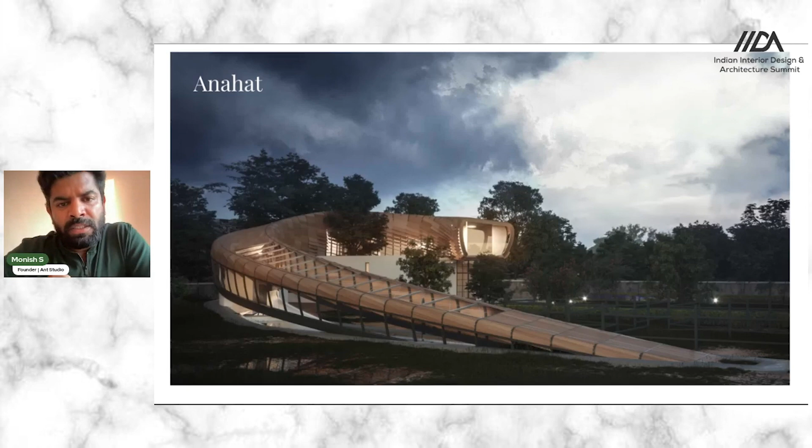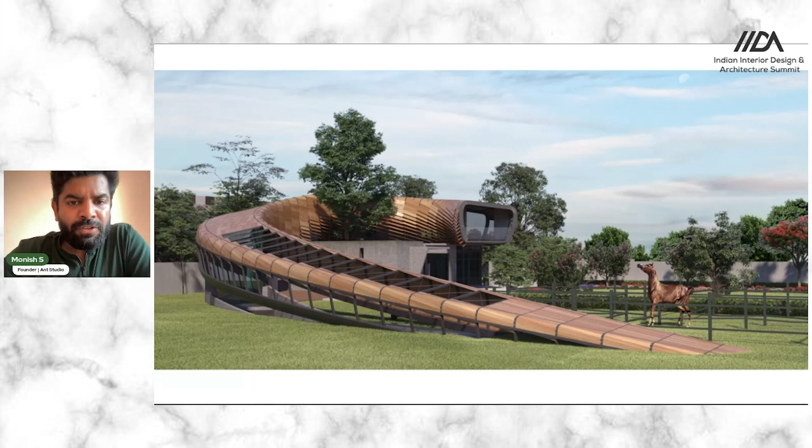So this is one of the first residences. While we have done a lot of work with parametric design, at the scale of a residence, this was one of the first works that we have done. These couple of renders were given to the client pretty long back, I think 6 or 7 years ago, which the client accepted, and then we went ahead and built this. These are the built images you see on the screen right now.

While the design is something that is very subjective, and driven by taste—some people like it, some people don't, and how the form came up is subjective to taste—today what I really want to highlight is what really went into it in terms of the effort, the tools that we looked at, and how much time did it actually take to deliver this.

If we had to do the same thing again, we'll probably do it much faster—probably this entire design in 2 to 3 weeks time, or even less, with all the details and bringing it to this level of detailing. But back then, it took us near about 4 to 5 months to optimize it, bring it to this level with all the parametric Rhino, Grasshopper, some bit of coding, optimization for the materials, and so on and so forth. It took us a long time to do.

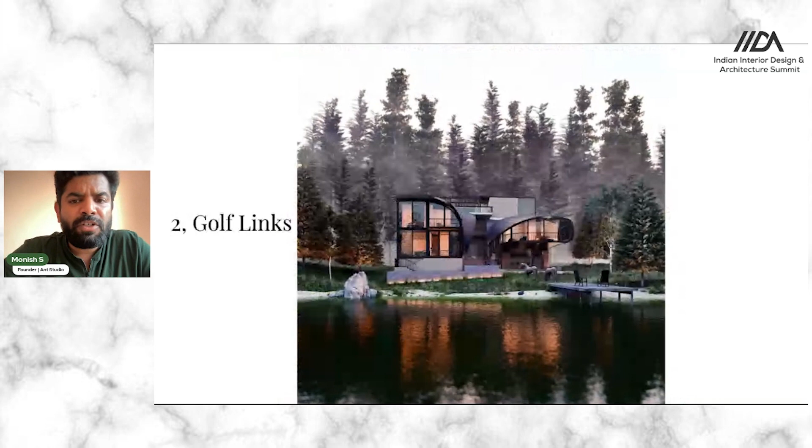But luckily, in this case, the client really liked it, and we went ahead and built it. What you see are the drone shots. This is another project, which we built for a client in Golf Links. We designed it for a client here.

Using similar principles of parametric design, we did a lot of work on this project. This entire design process took us 3 to 4 months because the client wanted a lot of iterations made to the design. But the sad part is, after working through such a rigorous exercise, the client actually wanted to see what is really possible if we went the experimental route, and in the end we did not actually make this design. That's the sad side of things I wanted to highlight.

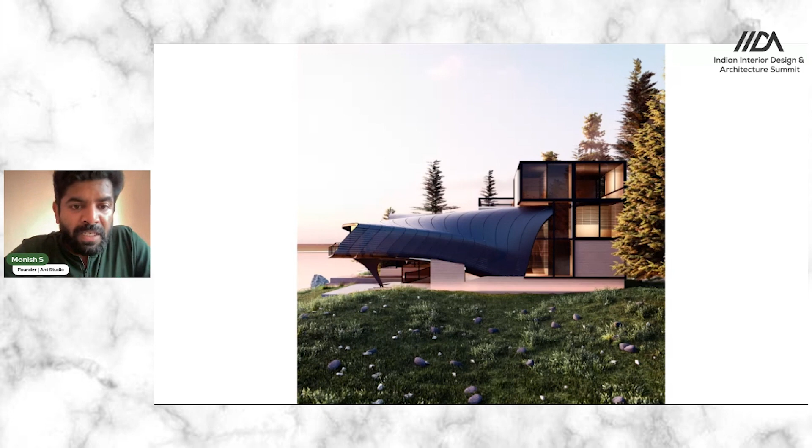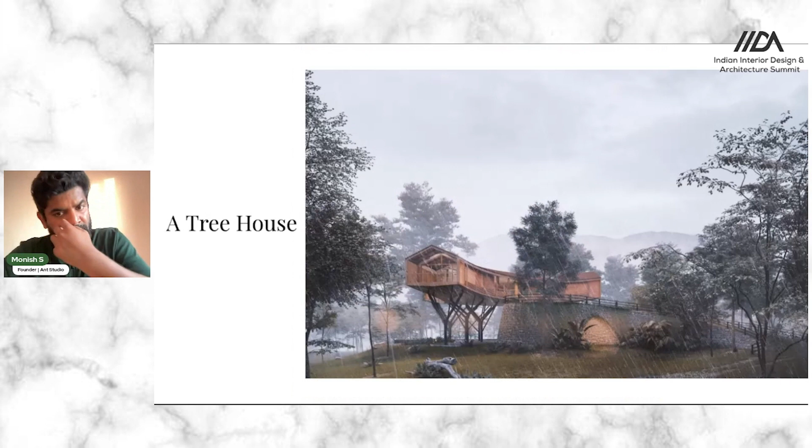In the whole process, we lost nearly 3 to 4 months of work effort. Ultimately, the client wanted something really simple. That's what I wanted to highlight, that after working so long this project did not materialize. These are some other cases, projects we've done using the standard way of Rhino modeling.

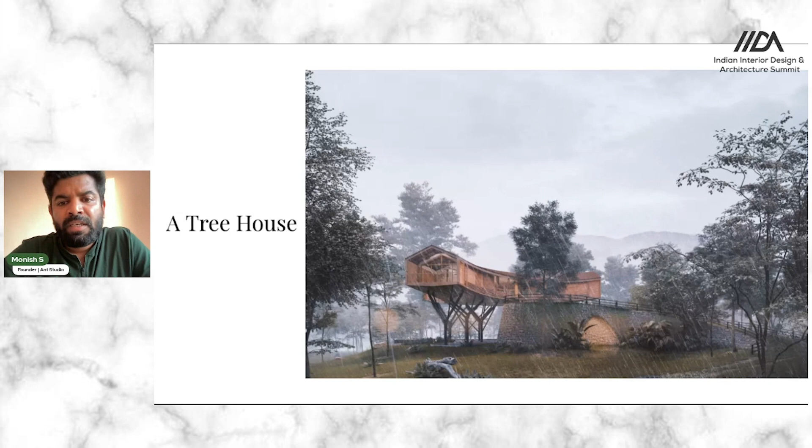This was a project proposed for a farmhouse in Kerala, developed the standard way with 3D modeling tools, renders, and so on. This is an ongoing project that we're working on.

Here again, the client really likes this futuristic way of looking at designs. We started the whole design by saying that for him the inspiration is fictional characters. He wanted his house to be somewhat like that of Iron Man, and he said, 'I want something really cool.'

There's a golf course right in front of it. He wanted the house to have the driveway reaching up to the first floor, a drop-off, and a view of the golf course in front. He wanted the house to be something absolutely futuristic.

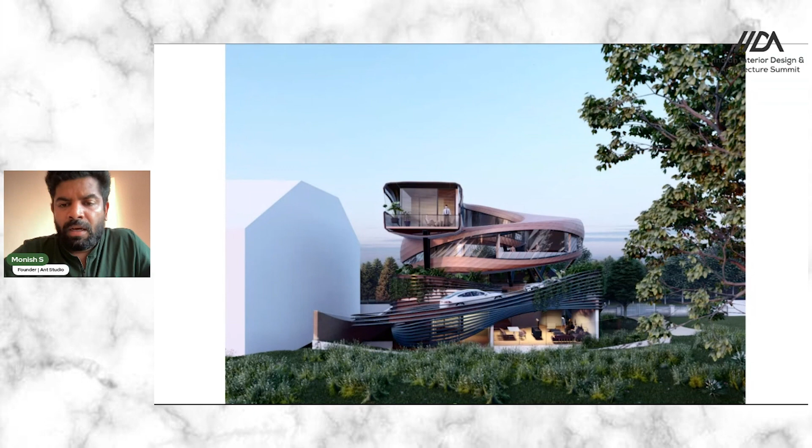This is still a work in progress, and we're optimistic it will hit the ground soon. But this again took a lot of time for us to reach this particular stage.

So why am I talking about the time factor? It's because these things are changing quickly. I'll talk about the essence of time and how it is changing with AI in the next part of the presentation.

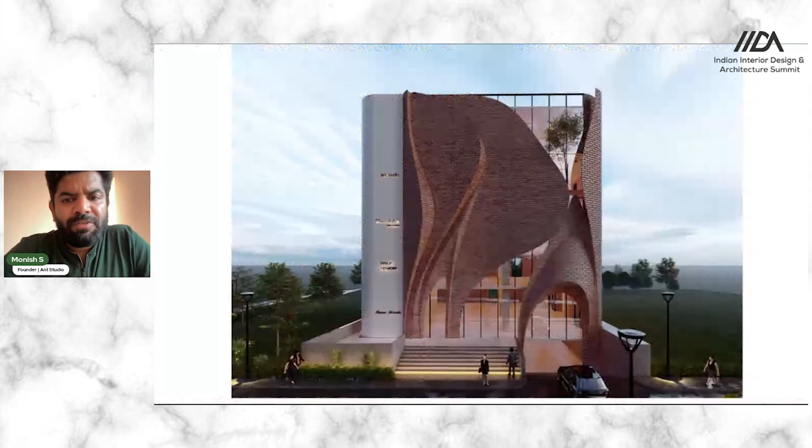This is some other work where we are using similar means, like terracotta, to do parametric design, so that a simple material like terracotta can fit into the whole concept of using parametric design tools and technology. This is another project we've proposed for a commercial building.

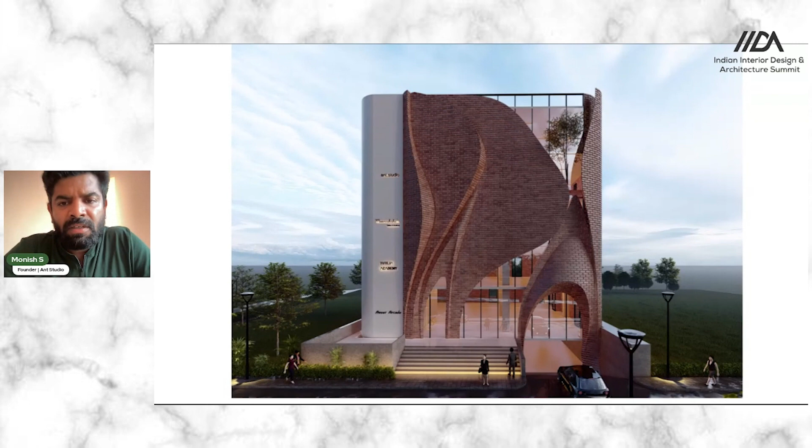In Raipur, with exposed brick we wanted to do something purely parametric and artistic. The form is something perceptive that one can like or dislike, but the whole idea behind this is that typically commercial complexes are covered with glass facades.

So we said, okay, what if we reduce the amount of glass so that direct radiation into the building is reduced, but at the same time deliver something with brick that's very modern, contemporary, and also fluidic, introducing these parametric tools.

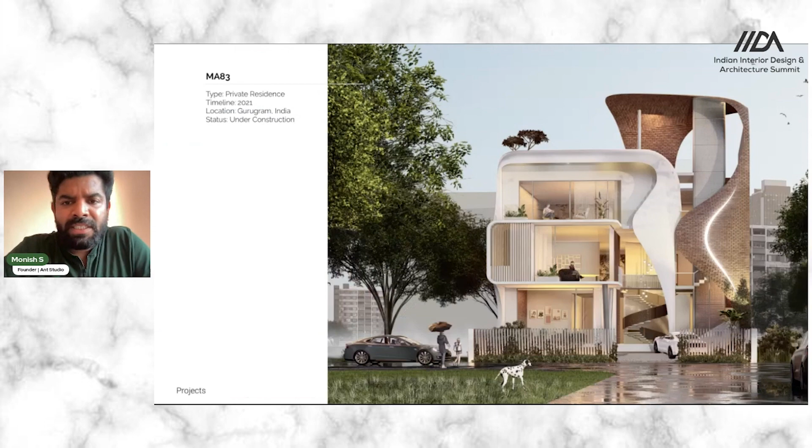This has been our design language in almost all our projects. I think this is a standard design process where we try to combine these tools and bring out the best using natural materials in the process.

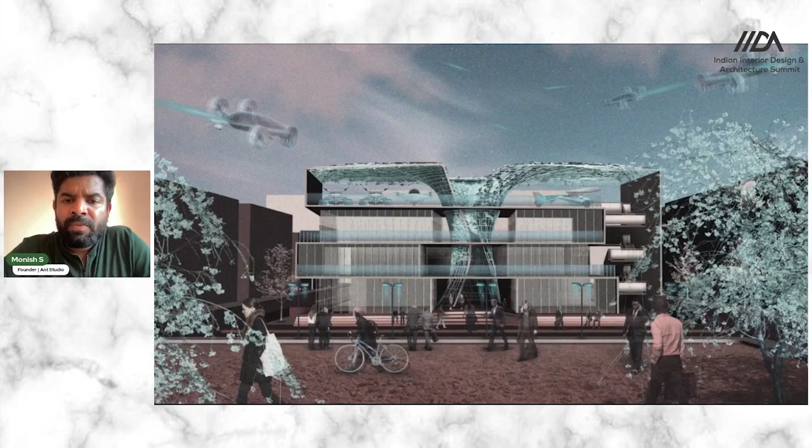This was another proposal. Again, in this particular case, we worked quite a lot of time on this project, but then it did not materialize going forward.

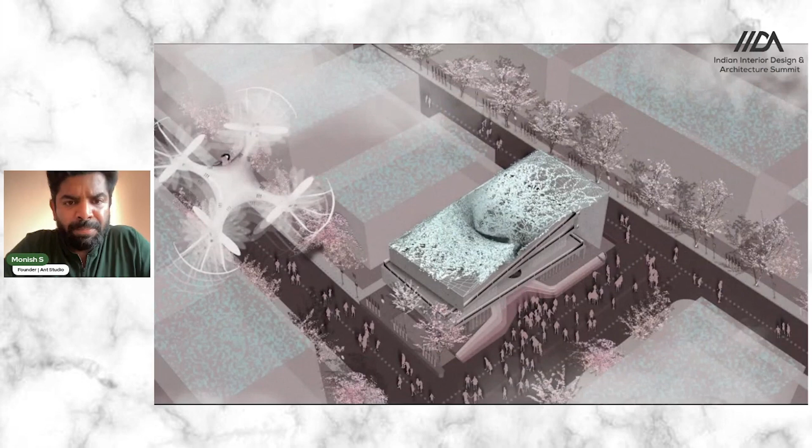So what is changing? I think that's the biggest question we keep asking. We could have saved a lot of time in the whole process, because the new emerging parametric tools we all talk about right now are helping us imagine stuff like never before. Architecture is changing because we're now able to go closer to imagination.

Whatever we can imagine, we can take out on the screen, and we can take it out of the screen and make it real with the help of modern fabrication tools and computational technology. In India it's not yet there, but I've done my PG diploma in robotic fabrication. I think pretty soon even robots will start making a lot of noise in the construction industry, where you can make anything and everything, which is absolutely possible.

So the whole question remains: first of all, are we ready for that? In the Indian context especially, one question that keeps popping up is, does it fit our context? Does it really fit what we are doing? And does it take away a lot of jobs? There are a lot of questions around that. That's a much larger conversation, and I'd be more than happy to discuss those in the Q&A.

In the overall presentation, I'd like to touch more on the technological part, but not on how it fits in the Indian context and so on. But yeah, like I said, all of these things are possible.

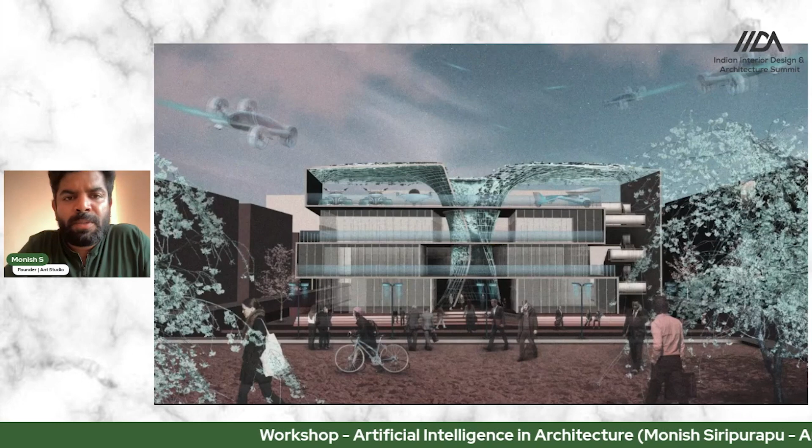But what's happening now with AI is that these things have changed drastically. The whole conversation of design, and what we're talking about to the clients, has changed completely, and we are trying to explore it at different levels in the design, which I'll talk about in the next part of the presentation.

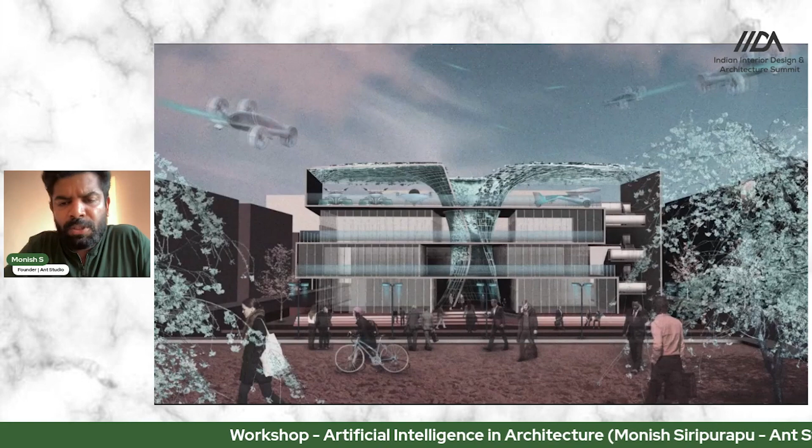Very quickly, I'll also touch upon another aspect of our practice, which is adapting traditional building envelope cooling in buildings. So how we can actually use — India is a huge nation with diverse ethnicities, climate, fabrics, and all of that.

And then with the help of globalization, what's happening is we are making all buildings alike across the entire country. So we are saying, with the help of technology and natural materials, can we combine these two things to make adaptive building facades that fit different climatic conditions.

In this particular project, I only want to take one aspect of it which is probably relevant to this conversation, which is how numbers and parametric tools play a role in this. I'll skip through the basic concept of what is passive cooling and all of that.

But rather stick to the biomimicry part, which is: what if building envelopes start behaving like the foliage of a tree? What we mean is that the moment you walk under a tree, there is an instant drop in temperature. Even if it's beyond 40-45 degrees, you'll notice an instant drop the moment you walk under a tree.

This happens through a simple process called evapotranspiration. So we are saying, what if we try to replicate that process in building envelopes, so that people residing inside can benefit from this natural cooling internally? What if building envelopes start behaving like foliage?

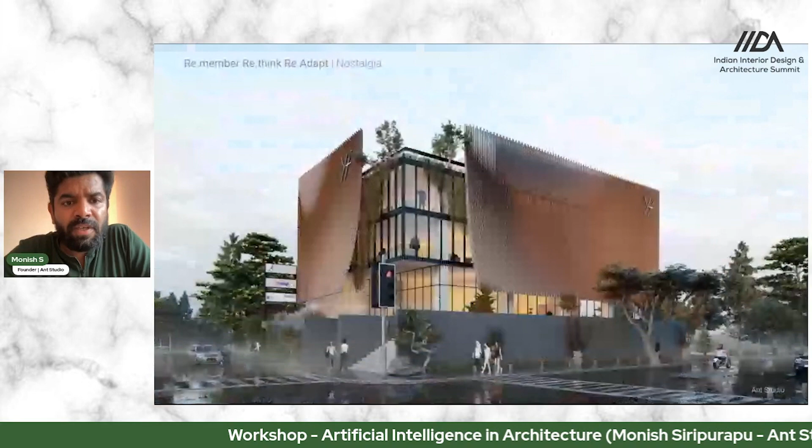So this is some of the work ongoing right now, where we're working with terracotta, wherein building envelopes can both shade and cool at the same time. This can be done in different orientations. You can set the spacing so you get the right kind of daylighting inside. Everything can be regulated — you can set the angles and so on.

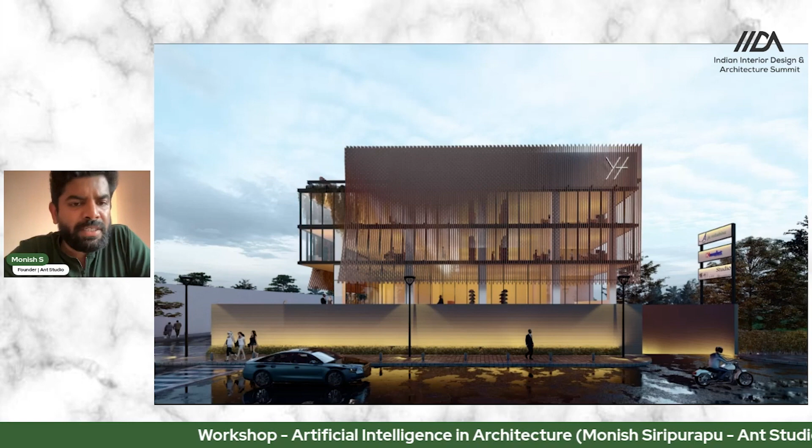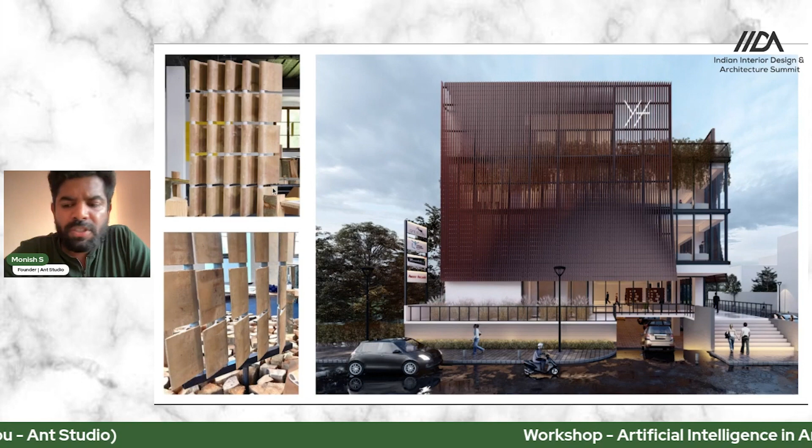So this is what you see on the left, the prototype that we have made for this. We have some projects we're building right now with this concept, and how it can be adapted onto buildings. Some other examples of the same thing.

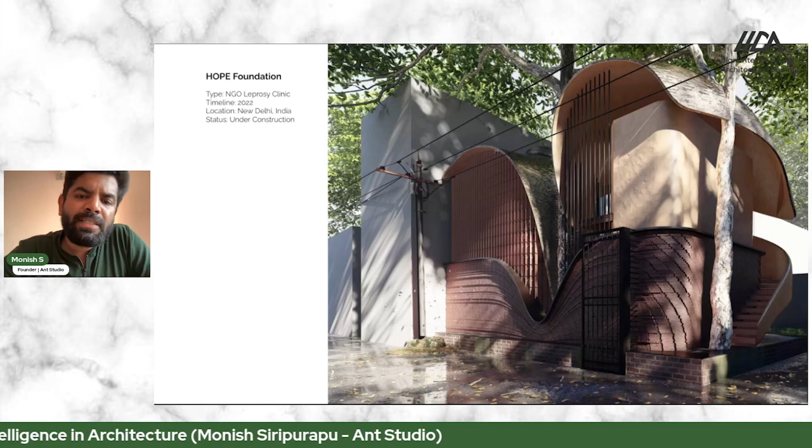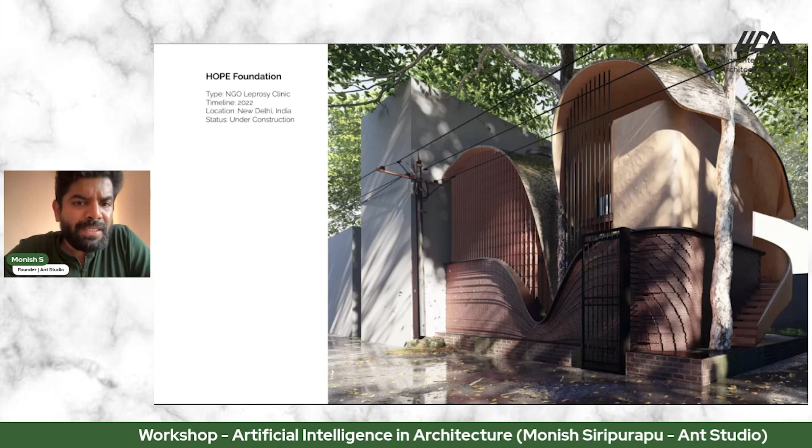In this particular case, the parametrics are being used in a different manner altogether. But here it's not purely about the form, it's more about the performance. So we're using a lot of energy modeling tools, working with some of the brilliant minds in the country.

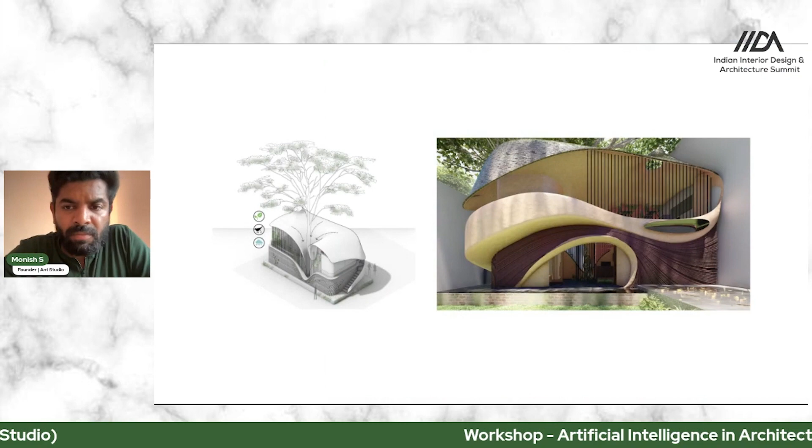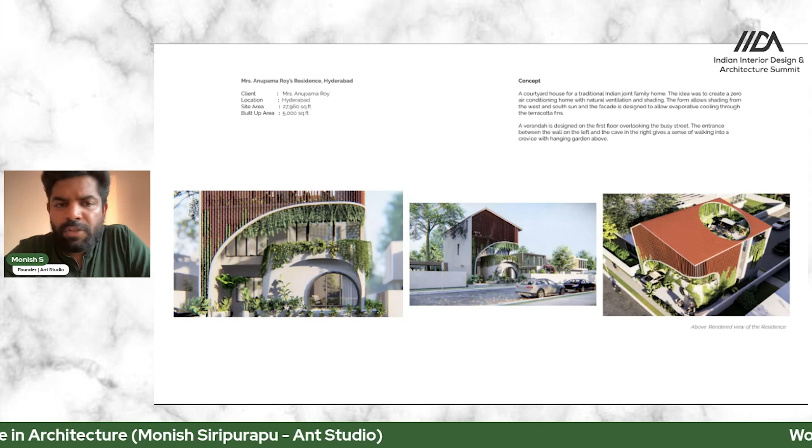who are working on energy optimization, energy modeling for buildings, to evaluate the overall performance and how we can keep constantly improvising this setup. There's a leprosy clinic under construction right now, and other projects happening, including one in Hyderabad that's under construction - a fully passive house, and a very futuristic parametric house coming up in Hyderabad, using all natural materials and exposed brick.

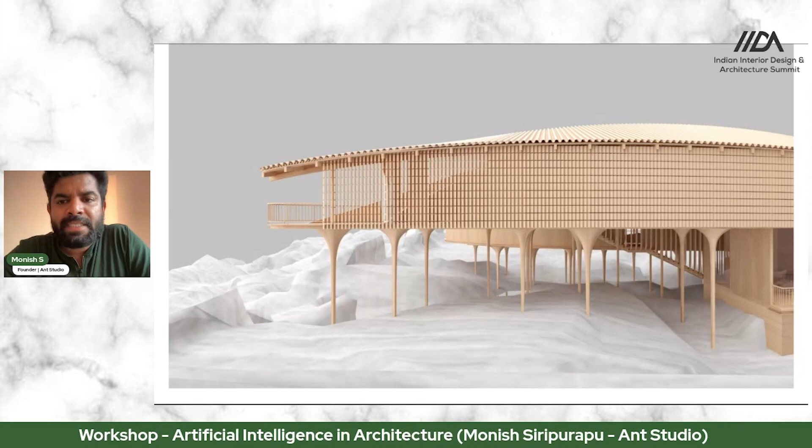But the form is, like I said, very experimental and free flowing. So yeah, that's about this work. I'll skip through this particular part of the presentation and stick to the next part, which is artificial intelligence.

So any questions so far? Anything, Ishal? Should I continue?

Yes. So what's happening with artificial intelligence is something we must have seen or heard recently, the possibilities of what AI can do, especially in the construction design industry, and it has taken us by storm. AI has really exploded in the last year, not just in architecture and design, but in many different fields.

There are a lot of possibilities that we are seeing right now, so I'll talk about it. Even in our practice, we are starting to see the implications, and it's both fascinating and scary at the same time.

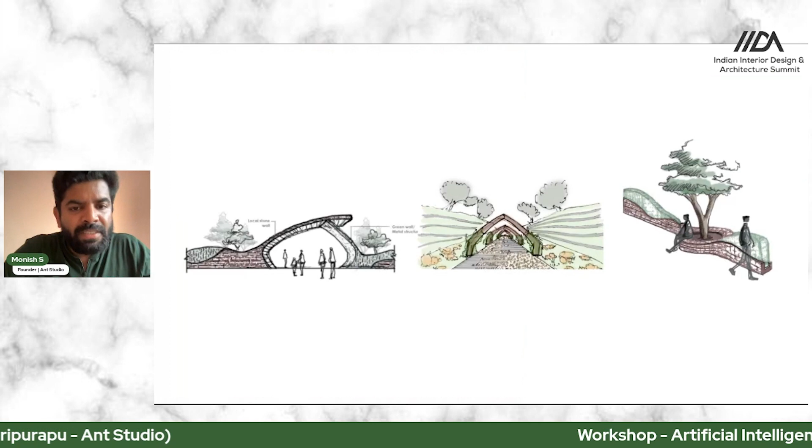These are still sketchy, so in the presentation we combined it with traditional handmade sketches for the client. I'm showing you exactly how we presented to the client, combining these sketches and images together. That's what we showed the client, this master plan.

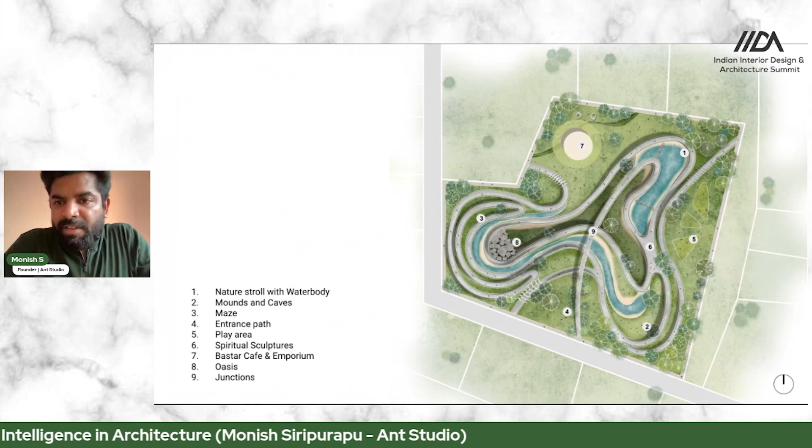I would have asked this question had it been a live session: what would have been the client's response looking at this? I did ask the client what he thought of the whole thing. To our surprise, he did not even realize that all these images were AI generated, which was totally unexpected, and it did not even matter to him. What mattered is that, okay cool, this is how it's going to look.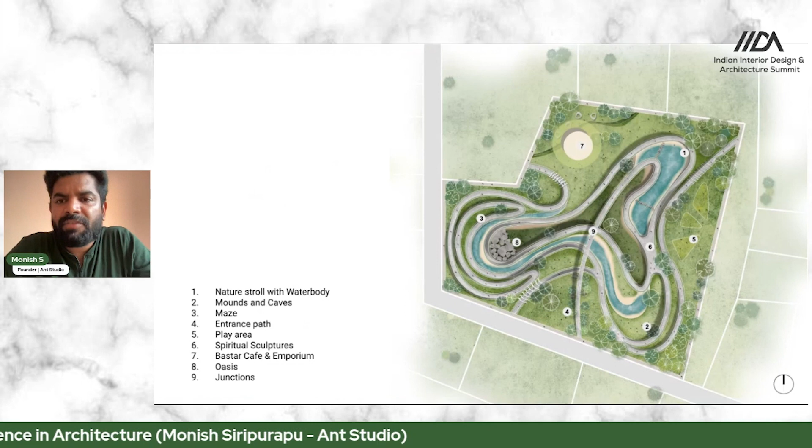Ultimately what mattered to him is this plan, which is AutoCAD and Photoshop generated, not AI generated, something that we actually designed. For the client, it did not really matter what tools we used, as long as he was getting the end result.

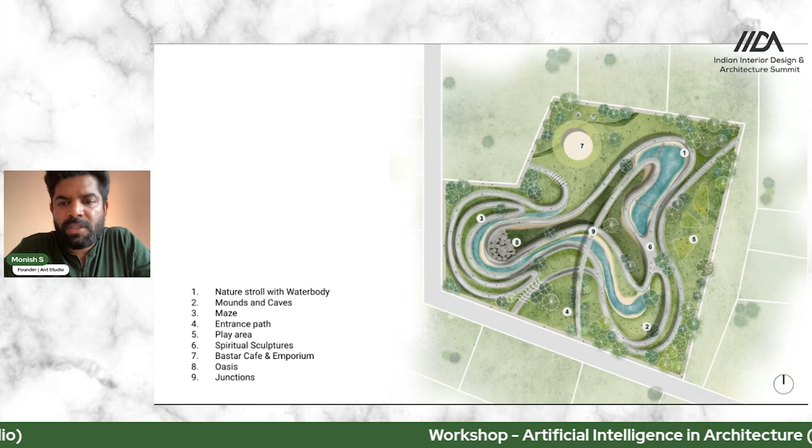So we realized there is a strong potential for AI, and we should keep experimenting and taking it forward. The reason I went through all the presentations earlier talking about time as a factor in parametric tools, is that now these things happen in two days.

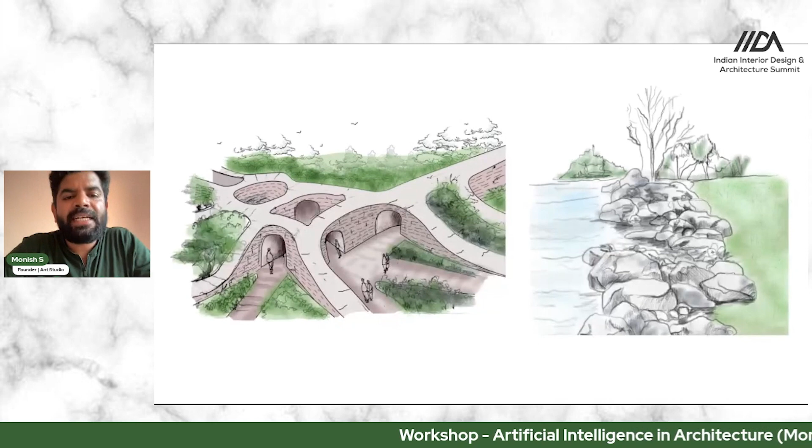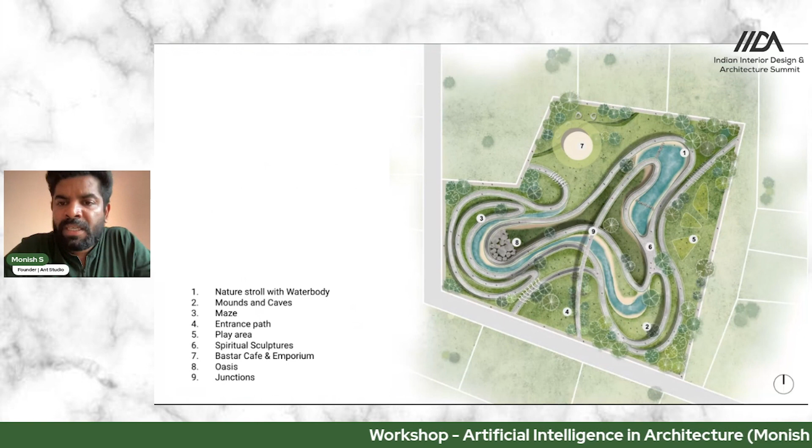We didn't have to create a detailed 3D model, render it, and wait for him to say yes or no. This presentation was done, and the maximum time we took was actually to make this Photoshop plan render look the way we wanted. Everything else was done in a matter of days, and we managed to pitch it to the client in less than 10 days.

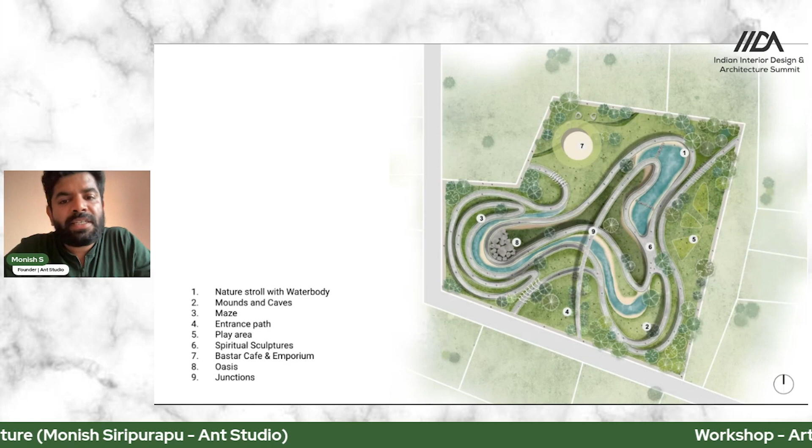Now that's where things are, that's why I used my initial works to talk about how things are changing. The second thing from artificial intelligence is augmented intelligence, where it's a way of working together in partnership with this technology.

We do half the work and let AI do half the work. This is the model we enjoy most in the studio right now, because there's still a lot AI can't do at the level of resolution of the plan and getting the right kind of output the client wants. Most of the time the generated images aren't actually what the project demands, we still don't have full control, though there's a lot more control possible now than just a few weeks back. That's how fast AI is growing.

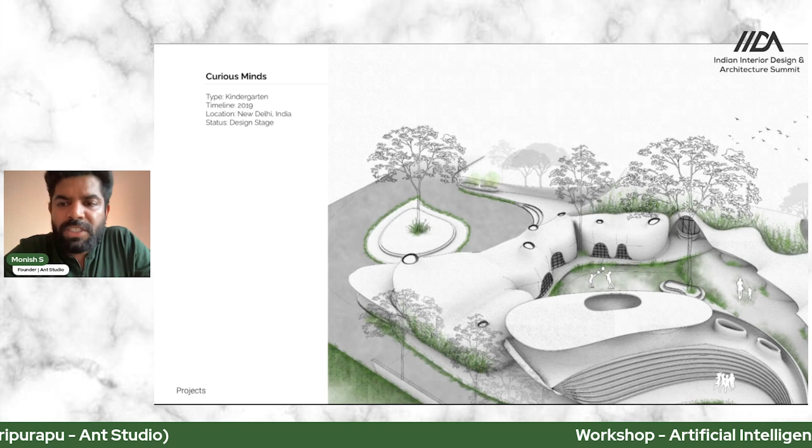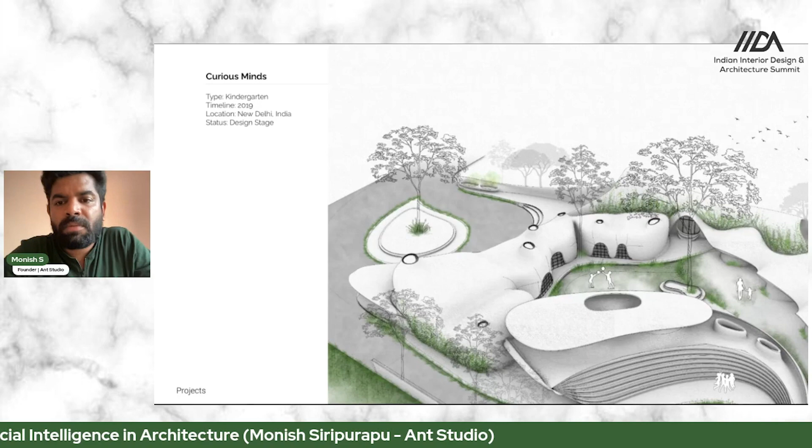But you still need a little bit of human input. I think this is the best process: augmented intelligence, where we first design, and then use AI to tweak our designs and make changes. This is the same school I initially presented with the cacti, done using Rhino and Grasshopper for modeling, which I'd call the standard process right now. Then we came up with these renders, which are Lumion generated, not AI.

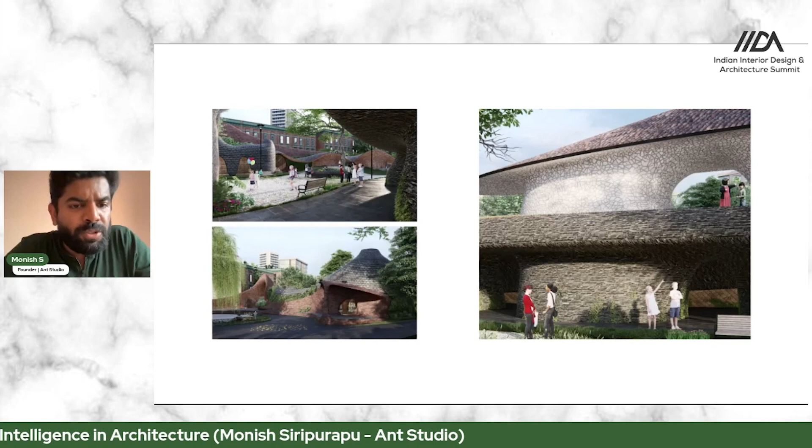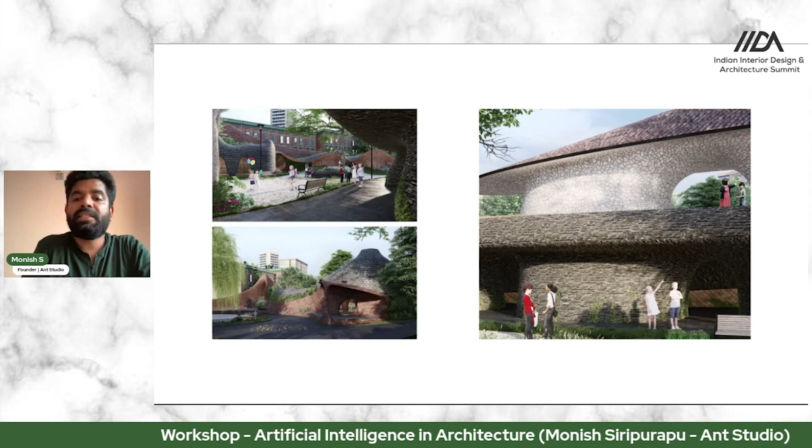So we pitched it to the client, and the client's response was, hey, I really like it, but the only thing is, we are doing a school. So when you're doing a school, we want the finishes to be really soft, so the kids don't hurt themselves when they're playing, and so on. These are the kind of comments we received.

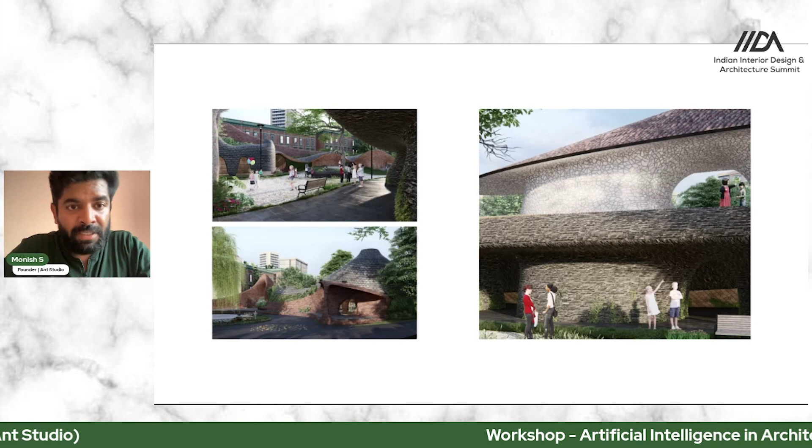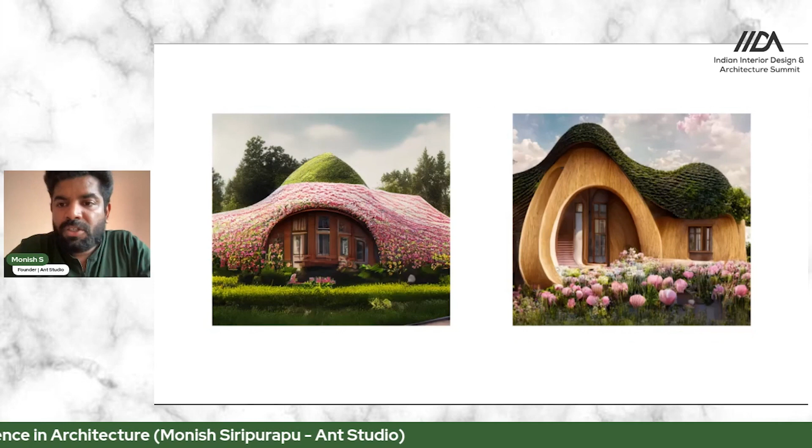So instead of trying to regenerate these renders in the software, we wanted to do it quickly and discuss it with the client instantly. We said, okay, we want to give this image as a prompt to AI and ask what AI can do and give us.

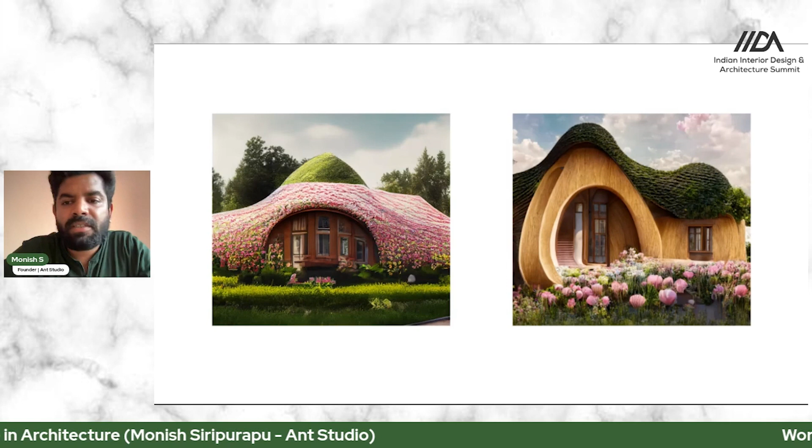This is what AI gave us as options for the client, saying you want something soft with flowers and everything. While it's not exactly the design we gave, it gave us options talking about how we can transform the design using softer finishes, softer materials, which are kid friendly. On the right, you can see the roof with a garden, and the facade in wood. This might not be possible practically, but these are some of the images the AI gave, which are softer.

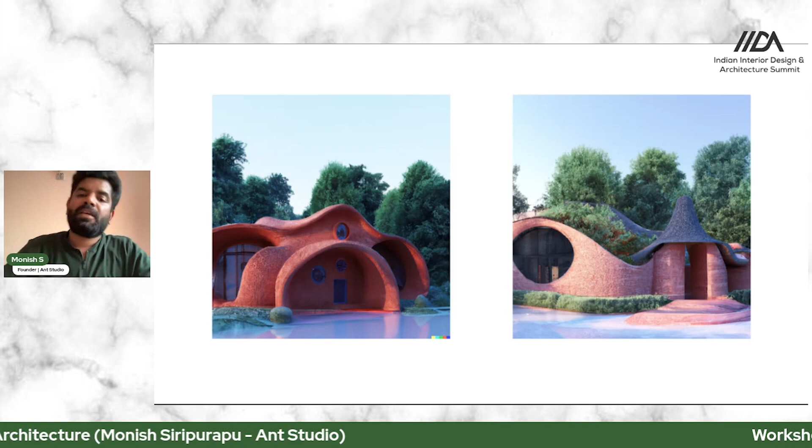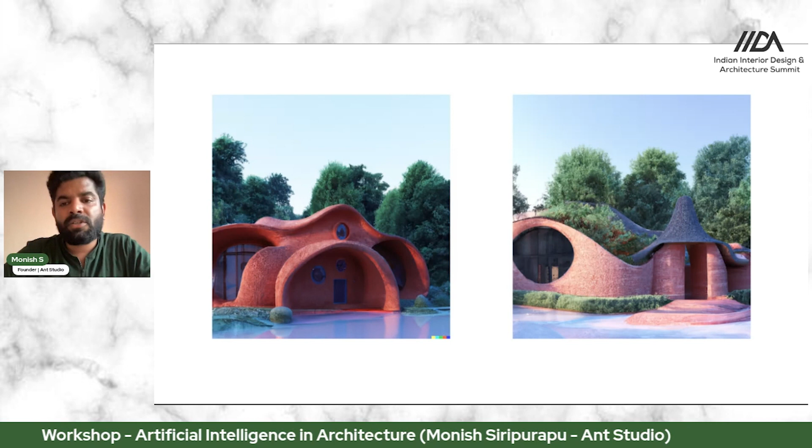This one you can see has a rammed earth or lime plastered finish, which is much softer than what you originally saw. We managed to have a conversation with the client really quickly, without going through the hassle of sitting on the screen and developing these for at least a couple of weeks of work. We managed to cut it short and show this instant result, have conversations, and take it ahead.

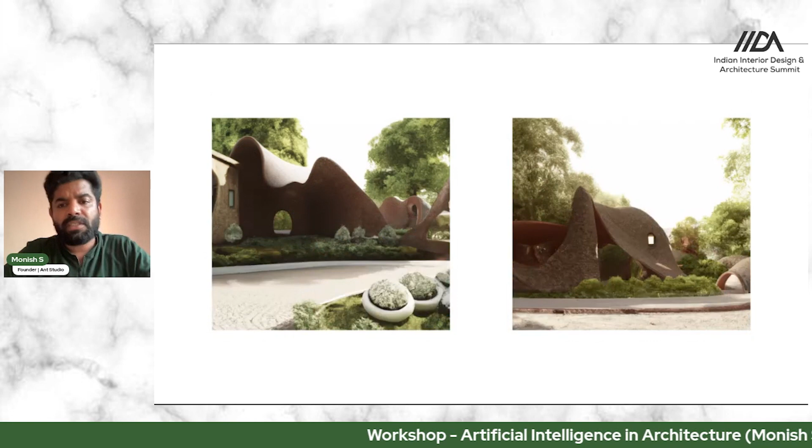So yeah, that's how this AI, this augmented intelligence, is actually helping us in a workflow.

Now I would like to end this. While I think there are many possibilities that exist, one thing I'd like to emphasize, especially in our practice, is that a lot of people are very much concerned about the role of AI, what AI can do, and whether we will still have our jobs a few years down the line.

Is design what it is? Who owns the ownership for the design? If AI is designing, do we still own it? There are a lot of questions that still need to be answered, which we don't have answers to. We can debate, but I don't think anybody has a collective answer for that.

But one thing is for sure, I think what we're looking at with AI right now is still just the tip of the iceberg. And as a practice, I think there are a lot of things we can actually do better. We all, at most studios and firms, big companies, small companies, individuals working, we all work in bubbles and in our own means, except for a few studios combining and doing something. I don't see us doing a lot of stuff together.

So when you compare this with other fields in the industry, whether it's automobile, IT, technology, or any other field that uses technology, there is a lot of collective intelligence, sharing of patents, data, and cross collaborations that happen, which benefit the industry largely. I think in architecture, that is not what's happening.